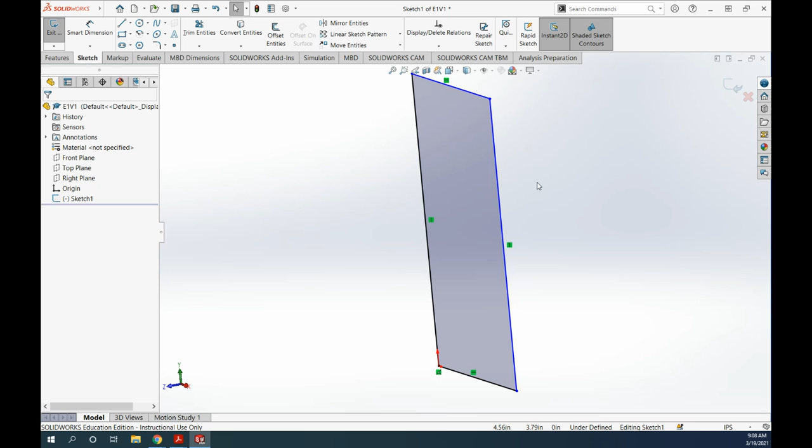We're going to pick up right where we left off, with this thin two-dimensional rectangle that is 5 inches by 3 inches. I'm going to hit Control 1, and that's 1 on the numbers at the top of your keyboard, not on the number pad. That gives us the hotkey for the front view.

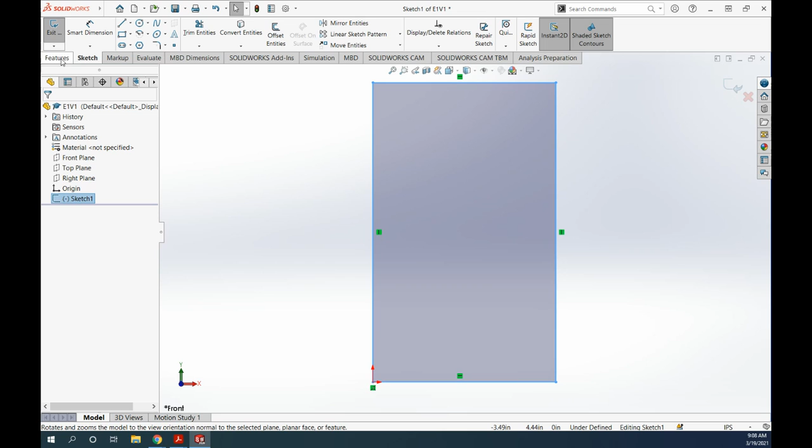With this now created, we can take this two-dimensional sketch and turn it into a three-dimensional item. You might recall from the last video, a lot of SOLIDWORKS processes involve creating a general shape in 2 dimensions and then converting it to 3 dimensions, and we do that with these 2 tabs. So I'm going to click on the Features tab and click Extruded Boss/Base, which we do a lot.

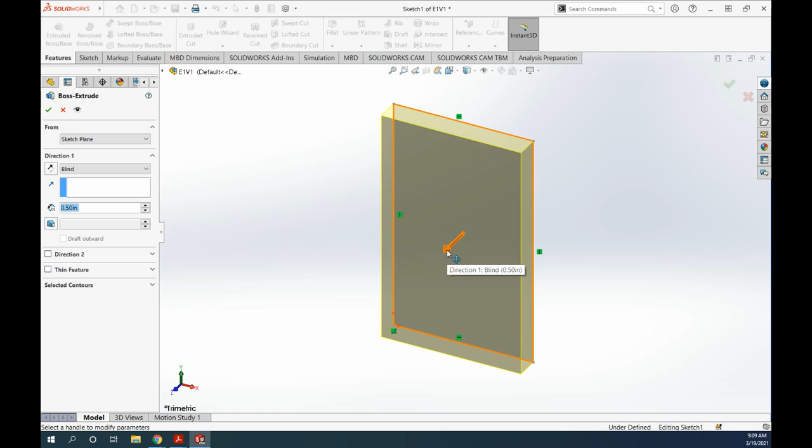You can see that SOLIDWORKS automatically changes the view to trimetric, to give you a better idea of the effects of what you change here with this extrusion. One way to do an extrusion is to select the arrow and drag it whichever way you want it to go, but it's a little trickier to get the exact measurement you want that way.

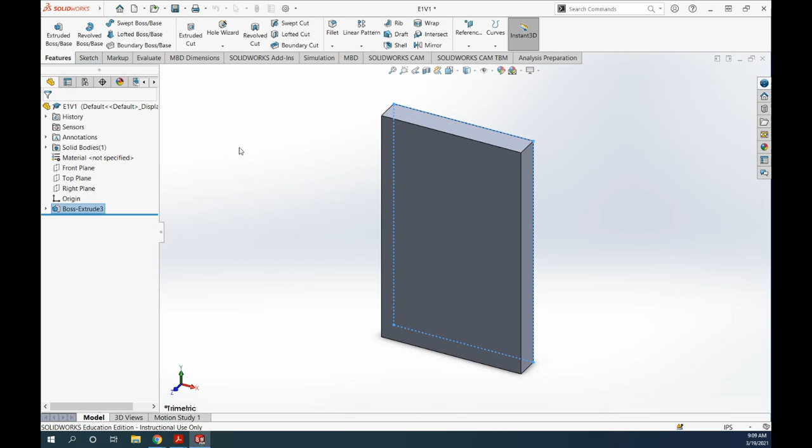So what I prefer to do is just type it right in this window. I'm going to make it a depth of 1/2 inch, and that's where I want it, so I'll hit enter. Now you see we have this object where we can select all the different faces. That's a nice 3D object we can work with.

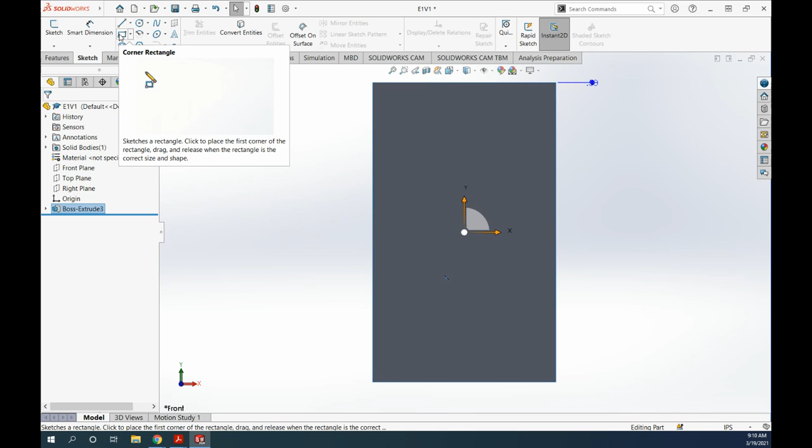Now we're going to make this a little bit more complex, just slightly, and show you one way of building onto your 3-dimensional objects. So if we go back into the Sketch tab, we're going to make another rectangle. I know, not a lot of variety just yet, but we'll get there. If you didn't already have this face selected, I'll just hit Escape here to get out of this.

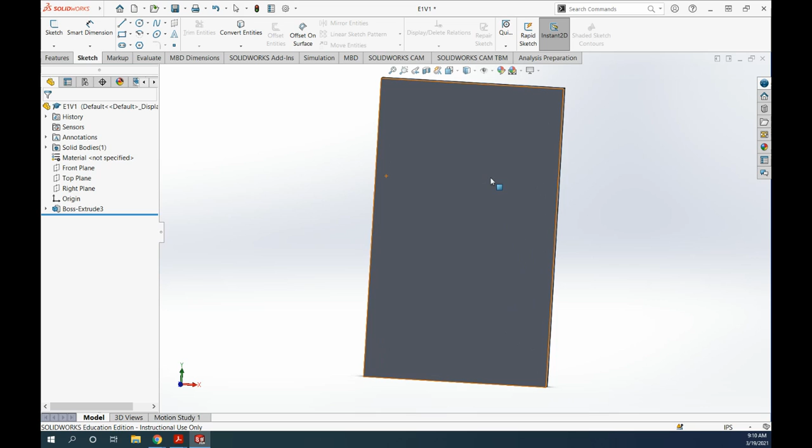And exit this new sketch. If you didn't already have a face selected, it will ask you, normally when you go into Sketch, to select a plane or planar face or edge to create your sketch on top of. So I'm going to select this one, and I'm going to hit Rectangle.

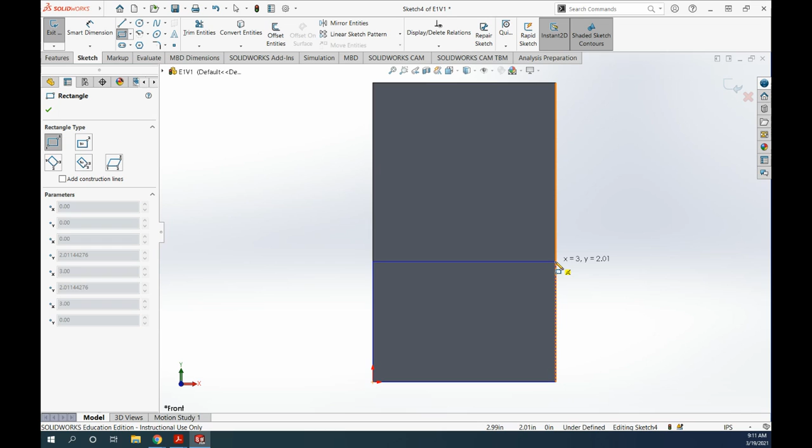I'm going to hit Control 1 to look at it front on, and come down to the lower left corner and wait for that little orange circle to light up. I'll click once, and come over until I see that highlighted orange edge, because that means I'm the same dimension as my larger rectangle. So I'm going to just click there.

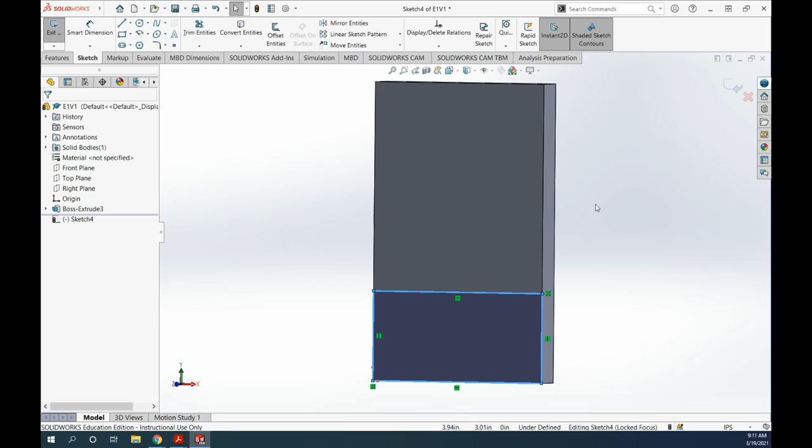You notice I didn't pay much attention to the other dimension, the y-axis dimension, because we can change it here. I'm going to make that 1.5, and you can see the change there, and I'll check mark out of that because that's where I'd like to leave it. Now you can see we have a 2-dimensional sketch on top of a 3-dimensional model.

We're going to make that one 3D as well. So click back to Features just like we did before, and hit the Extruded Boss/Base again. This time it didn't automatically change my perspective, so I'm going to go ahead and set that so we can see the effects of our change.

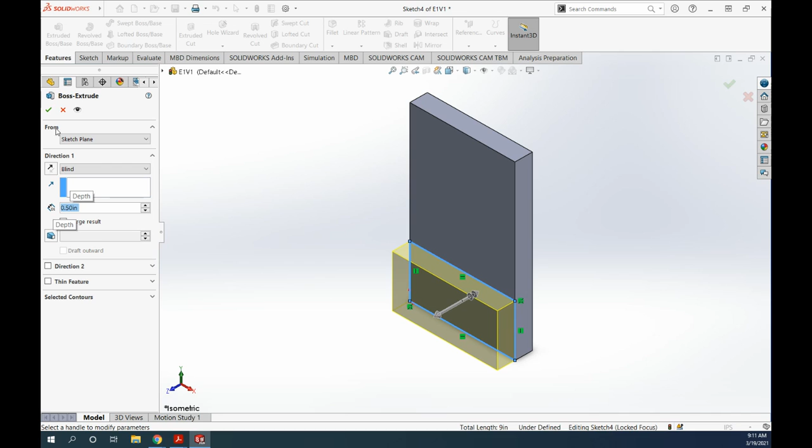Again, I don't typically like to use this arrow. I want to be precise with my measurements, so I'm going to type decimal 5 again, and I'll check mark out of that. Now you can see that our shape has gotten slightly more complex, and we can create 3D extrusions on top of other 3D extrusions.

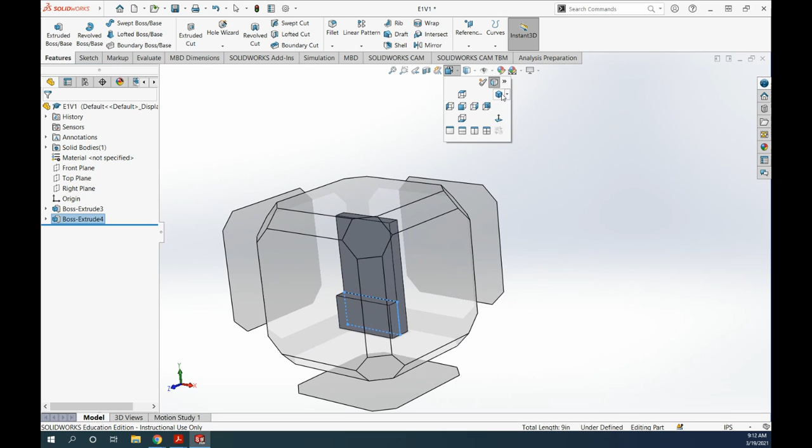We're going to leave that video there for now so that you can double check yours and make sure that you've had an opportunity to get yours exactly where I am here.